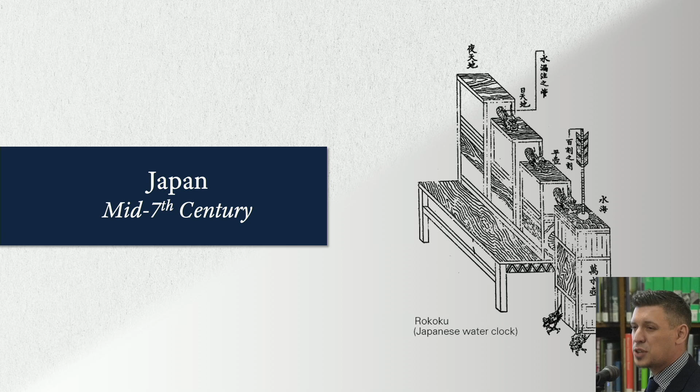So I'd like to touch a little bit on spring drive and how it connects to time and nature. And when I say time, I also mean history, right? The history of watchmaking in Japan, a little bit of a touch on history because I don't want to dwell on it too much.

But to give you the long story short, there's always been some influence from nature in Japanese timekeepers. When we go back to the mid-7th century, we have what's called the rokoku, or the water clock, which was adapted to Japan. This is utilizing nature to keep time. Also, the rokoku has a continuous motion, right? Completely fluid motion, just like spring drive.

Now, there were other timekeepers utilized in Japan. This is used for many, many years. This is something that was around for a very long time. They also utilized sundials, again, using nature to express time.

One of my favorite aspects of Japan's watchmaking history is the temporal timekeepers. So temporal time, or utilizing lunar time as opposed to solar time as we know it. Instead of doing 24 hours, 60 seconds, 60-minute format, they would actually measure time depending on season. So these complex clocks, called wadokei, actually changed depending on what season it was. The hours would actually shift across the dial.

So during the winter solstice, the hours of the day would be shorter, and the indexes would shift to express that. And then in the summer, the hours would change and become longer. The nights would become shorter. So this unique mechanism is a very unusual expression of time and nature.

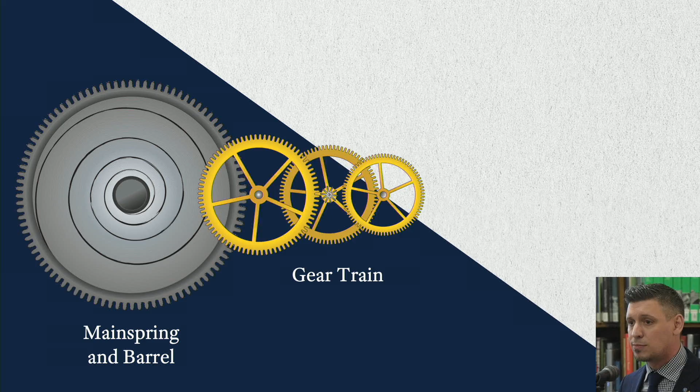Well, if there's no regulation, if there's no control of the pace of time, time flies. The hands just spin across the dial as fast as they can, and there's no power left in a very quick period of time.

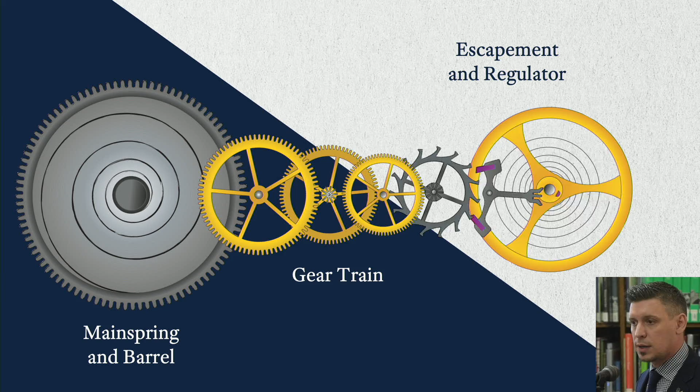So the escapement, or more specifically the lever escapement, is your form of regulation. The balance wheel acts almost as a pendulum. It oscillates, it rocks back and forth, and this develops a rhythm to keep an even pace of time. So this is your regulation, your pace, your rhythm, this is how we keep time.

And as Nick had mentioned, it stops and releases. It stops the gear train and releases the energy. It's letting energy escape in a controlled fashion. This is where the name escapement comes from.

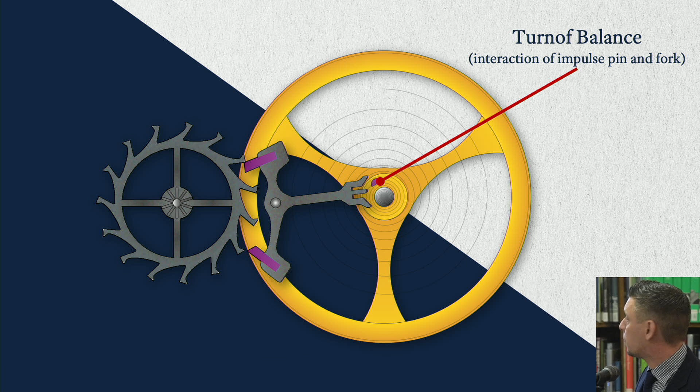So the balance wheel rocks back and forth. You have a little jewel on the balance wheel, which is called the impulse pin. The impulse pin, as it moves, knocks the lever. The lever escapement, this is the lever, also known as a pallet fork, which has 2 jewels on it, your pallet jewels.

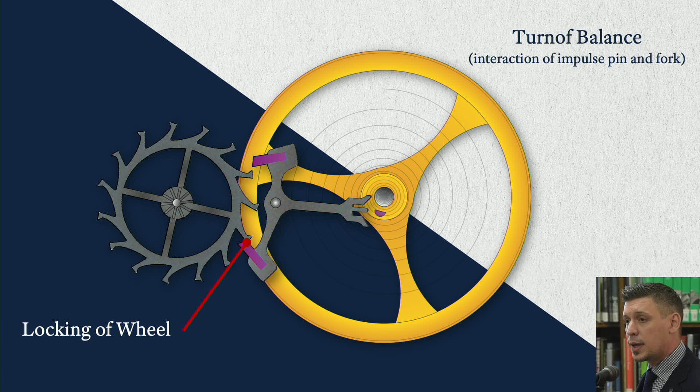The pallet jewels lock the teeth of the escape wheel. It locks on the flat inner or outer surface, which is called the locking plane of the pallet jewel. So there you can see how it's stopping and then letting go, letting the escape wheel turn.

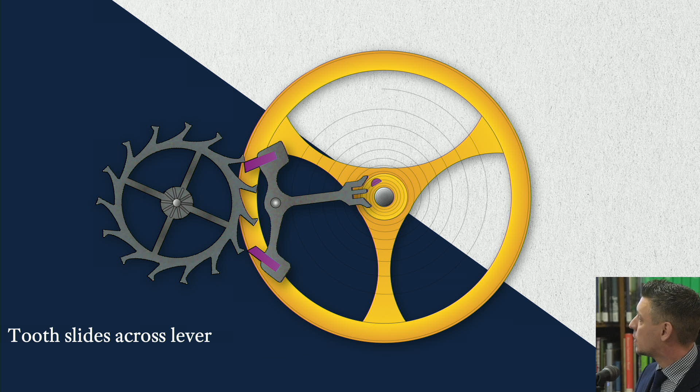As it does that, the tooth of the escape wheel slides across the angled plane that's in front of it, called the impulse plane. And that energy from the escape wheel actually transfers through the lever and delivers that energy back to the balance wheel so it can keep a good momentum. It can oscillate, it keeps the amplitude high.

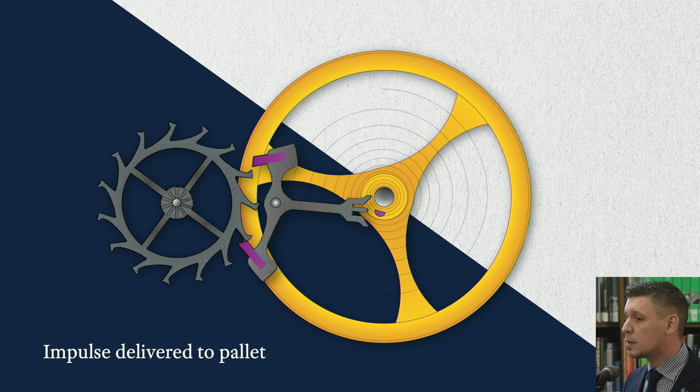This is how it essentially keeps time, with a stop and go motion. Lock and release, lock and release. As you can imagine, there's a lot of collision, a lot of friction that occurs in a lever escapement. But over the years, there's been a lot of developments to help heal, to help keep it operating for the hundreds of years that we've been using it.

So frequency, this is how fast that balance wheel is rocking back and forth, or the oscillation rate, how fast does it move. High-frequency watches were really chased during the 60s, there was a lot of development in high-frequency watches then, a lot of companies were doing it. The benefit of a high frequency is that you're eliminating margin for error, there's less effect from shock or outside factors as that balance wheel is rocking at a faster pace. So that's the benefit, but unfortunately there's a lot of wear and tear that comes along with that. So moving at the faster pace has its upside, but there's also a big downside, which is more frequent servicing.

We find today most watches have a frequency of 4 hertz. 4 hertz is equivalent to 8 beats in a second, or 28,800 beats in 1 hour. We hear these numbers a lot, what do they mean? That's the balance wheel's frequency. So one full oscillation back and forth is equivalent to a hertz in 1 second, that's the whole oscillation, back and forth. A beat would be half of that oscillation, or one direction.

In quartz watchmaking, however, they utilize a quartz crystal to develop frequency. And this is where things start to get tricky, because a lot of people don't necessarily understand how quartz watches work. But the reason quartz watches tend to be significantly more accurate than mechanical watches is because they have a very high frequency.

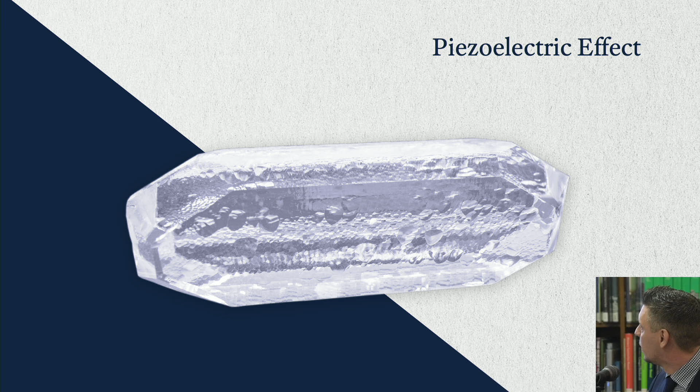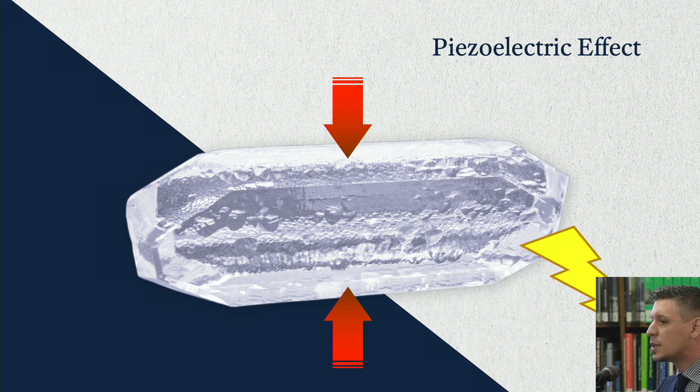In 1880, Jacques and Pierre Curie discovered the piezoelectric effect, which pertains to quartz watchmaking. They discovered that if you compress a material such as quartz, it produces a small electrical current. But in quartz watchmaking, it's actually the inverse effect that's applied. If you apply a current to a quartz crystal, it deforms, or starts to vibrate or oscillate. So this is how you get the frequency. You apply a little bit of electrical current to a quartz crystal, and it makes it wiggle, makes it move.

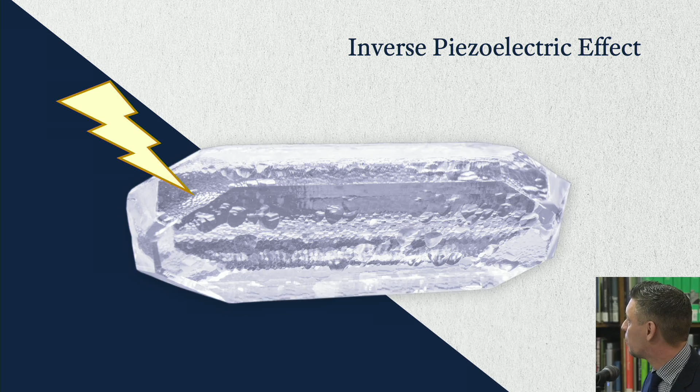Quartz watchmaking was chased by many during the late 60s through the 70s. It was much more prestigious back then than it's found today. I think primarily because of the 80s and 90s, quartz watchmaking became considered low end. But back during the 70s, quartz watches were quite expensive. Many people forget that or don't realize that. So with that said, I'd like to give you a little bit of an education on how a quartz watch works, because it's different. It's not something we necessarily hear about.

The quartz wristwatch mechanism, at least the most common form you'll find today, utilizes a battery. This is the power source instead of a mainspring. Your battery is giving you that little bit of electricity to make sure your watch is getting a frequency to develop a pace of time.

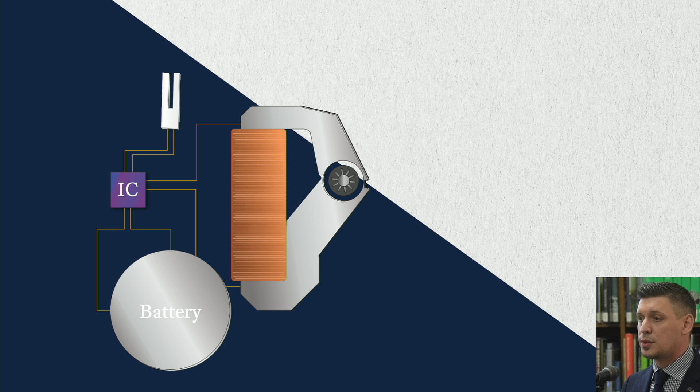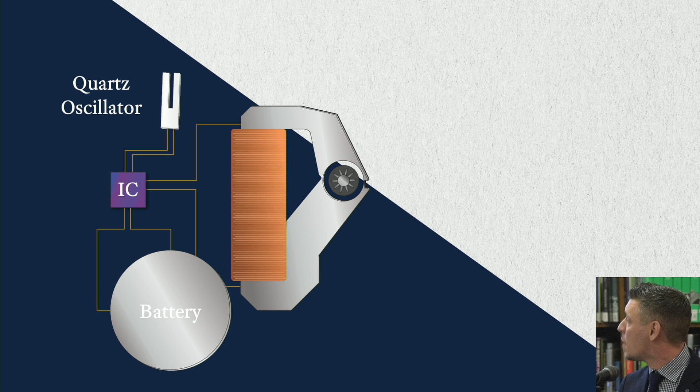The battery delivers the electricity to the integrated circuit. The integrated circuit then delivers the electricity to the quartz crystal. The quartz crystal oscillator vibrates at that very fast pace I talked about, 32,768 hertz, in case you forgot already. It's pretty quick. That frequency is then measured again by the integrated circuit, and it sends an electromagnetic pulse through these coils and coil block. The coil block acts as a delivery system.

This electromagnetic pulse is delivering energy basically once per second. That's why a second hand jumps on a quartz watch from second to second. It ticks. This is to help conserve energy in the battery.

So when it's delivering this energy, how do we translate that into mechanical energy? This electromagnetic pulse interacts with a rotor, and not like a rotor in a self-winding watch. It's not the same. This is actually what we call a permanent magnet. A permanent magnet is like what you would put on your fridge to hang a picture on your refrigerator. That's what a permanent magnet is. It's always a magnet. On that magnet is a pinion, or teeth. It's like a little gear that's attached to that magnet.

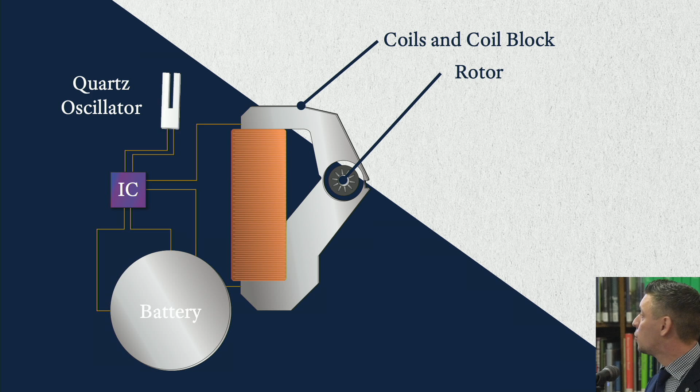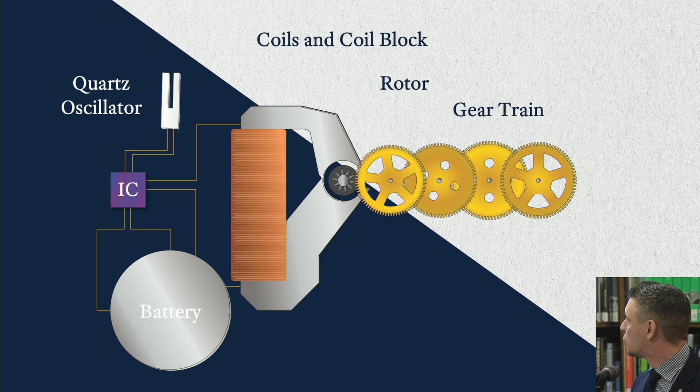So the coils and coil block deliver electromagnetic energy to make that little rotor jump once per second. That electromagnetic pulse is making it jump, and that's how you deliver energy to your gear train. This is your hands, the gear train is driving your hands. Unfortunately, quartz watches don't have a lot of torque, so they can't handle big, heavy hands necessarily. So in order to preserve battery life, you have a second hand that jumps from second to second, and you use lightweight hands.

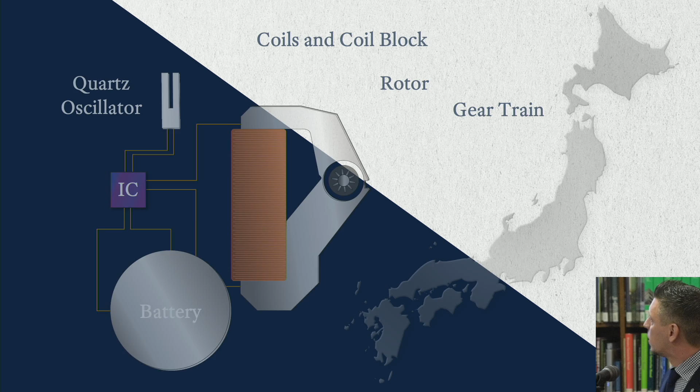So Seiko, you saw the 1969 Quartz Astron pictured there. That was the first commercially available quartz watch, sold in Japan, created by Suwa Seikosha. Suwa Seikosha is in central Japan in the Nagano prefecture. Now it's known as Seiko Epson.

Just to give you a brief rundown, Epson was born from an electronic printer developed for the 1964 Tokyo Olympics. A lot of people think Epson, the projector or printer company, has no affiliation to timekeeping, but it was actually a timekeeper. So just so you know the history, the background of where this name comes from, it built an entire dynasty. It's an entirely separate company. But now Seiko Epson in Shiojiri in Nagano, Japan, is responsible for making wristwatches, and they were named in honor of the success of the Epson printer.

So in 1971, a young engineer named Yoshikazu Akahane joined Suwa Seikosha. He was really a brilliant engineer. He developed something really cool in our history called the Twin Quartz.

It used two quartz crystals that compensated temperature for each other. They used the average between the two to determine how accurate the watch could be. And back in the 70s, he was able to create this and make watches that were accurate within 5 seconds per year. Pretty astounding, right? I don't think you can become that accurate in the 70s.

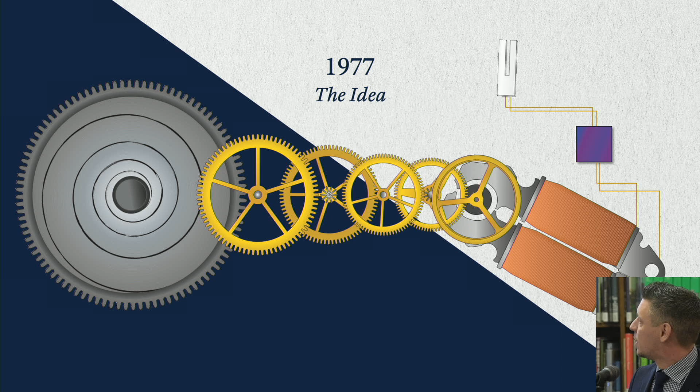But it's very influenced by position or shock or temperature. So he wanted to create something that had all the benefits of quartz in terms of precision and stability, but have this high power source, this never-ending power source from a mainspring. So he had this idea in 1977. He was way ahead of his time. So this idea was based on a bicycle rolling down a hill. And that had no brakes, just so you know.

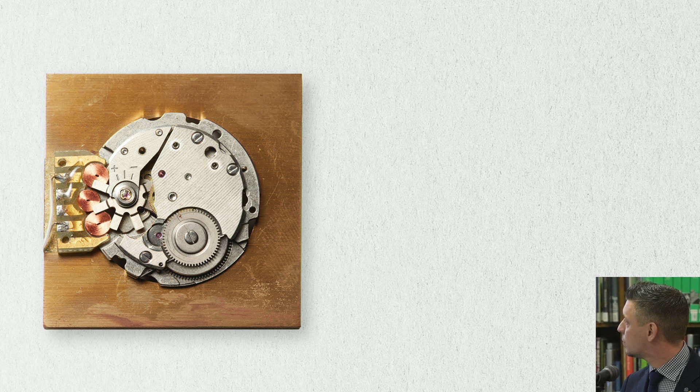But by utilizing brakes, you can slow the speed, keep an even controlled pace. Unfortunately, applying a physical brake is not good, because friction is a watchmaker's worst enemy, so we don't want that. So friction had to be eliminated. So to eliminate friction, he took that electromagnetic energy and came up with the concept for Spring Drive.

So in 1982, they had the first functioning prototype of Spring Drive. Pretty remarkable, had a 4-hour power reserve. Okay, maybe it wasn't that remarkable, but you got it to work, and that's what's important, right? They were on the right path. So the first Spring Drive, like I said, had a 4-hour power reserve. It wasn't as energy efficient as necessary, and it took a lot of power consumption. So in order to improve, it took time.

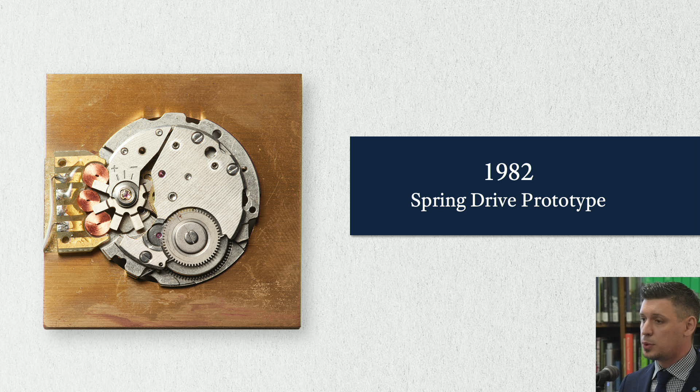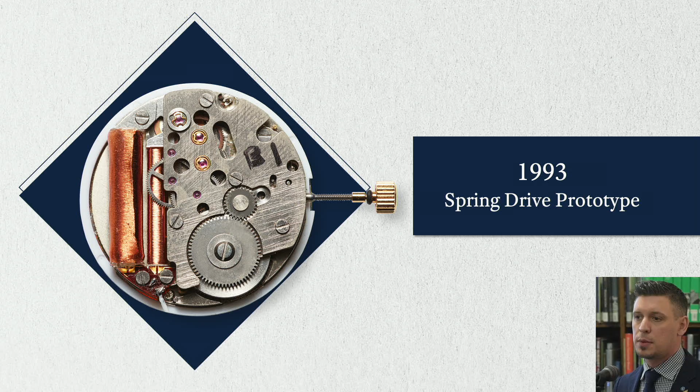By 1993, the next evolution in Spring Drive had occurred. Boosted, right? 4 hours, now it's 10. And this was thanks to a new integrated circuit technology that helped reduce electronic and electromagnetic power consumption, let's say. So this aspect was able to increase the power reserve because it didn't have to work as hard to try and make those electronic components work.

In 1997, a big breakthrough came. They had this internal goal for Spring Drive: they wanted to make it run for 48 hours. So 4 hours, then 10 hours, we got to get to 48. Well, they did it in 1997. The reason this was possible was because of a new integrated circuit technology that was developed by Seiko Epson, or Suwa Seikosha as it was formerly known.

So this prototype led to the first debut of a prototype in April at Basel World 1998. Success, right? We're getting there. A little funky design, but still very cool. I'd take one.

Sad part of the story today, though. Mr. Akahane, the brilliant engineer behind Spring Drive, he died in August, at the young age of 52. Thankfully, though, he was able to see his dream come to life. He had met his goal, and that is a huge success in, I think, all of our eyes at this point. Spring Drive is really something special. So Mr. Akahane's legend lived on in Spring Drive, still does today.

And in 1999, they launched the very first commercially available Spring Drives. Now, these were only released in Japan, so you may not see them. There's something that don't float around very often. I'm not hinting at anything that you might be able to see after we're done. So this was very small production. These were manually wound, and they had a 48-hour power reserve.

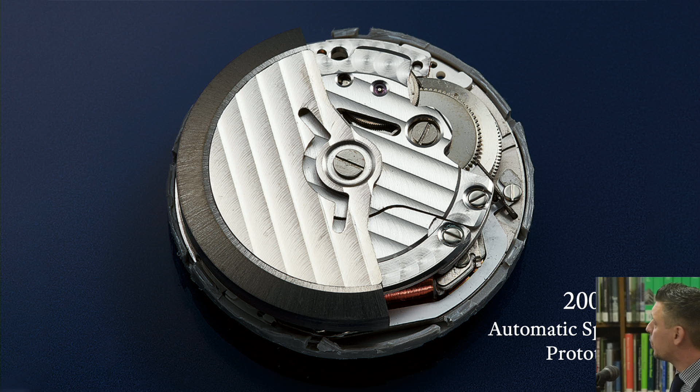From there, it wasn't until 2003 that the next real big development had occurred, and this was self-winding. It seems simple, but no, you have to have high energy efficiency, high winding efficiency. A lot of factors come into play in making this thing work. So thanks to the Magic Lever winding system, they were able to make a very highly efficient self-winding movement. And from that, also a new mainspring material.

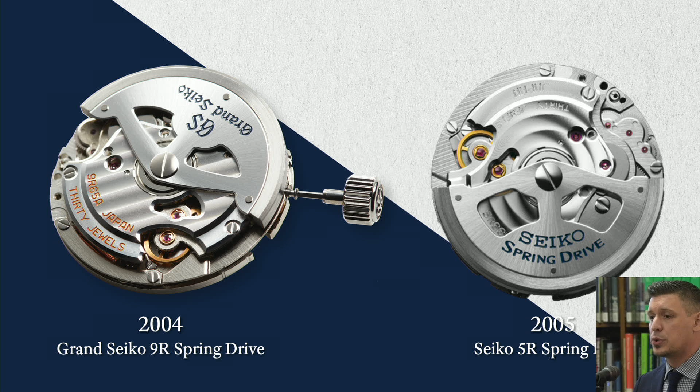In 2004, they debuted the first Grand Seiko caliber, the 9R spring drive. The 9R had a 3-day power reserve and amazing accuracy, coming along with basically all spring drives, within 15 seconds per month, equivalent to less than a second a day. Very accurate, very stable. In 2005, they launched it internationally for the first time, in the 5R Seiko spring drive brand.

So all this development, you have from 1977 all the way to 2005 to make it a commercial product worldwide. That was 28 years. That's a big investment, that's a big commitment, but it was done. And like I said before, Mr. Akahane's dream lives on.

Now comes the hard part. How does spring drive work? I think everyone wants to know. It's a mystery, right? It's an enigma to many.

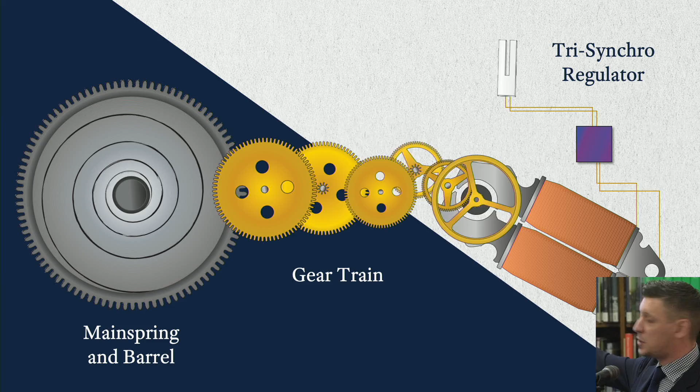As you saw before, you're going to see similarities from both worlds of watchmaking. You're going to see the mainspring. It operates the same, unwinds inside the barrel, delivers energy to the gear train. But by the time you get to where the escapement should be, it looks very different. We call this very different escapement system a Tri-Synchro Regulator.

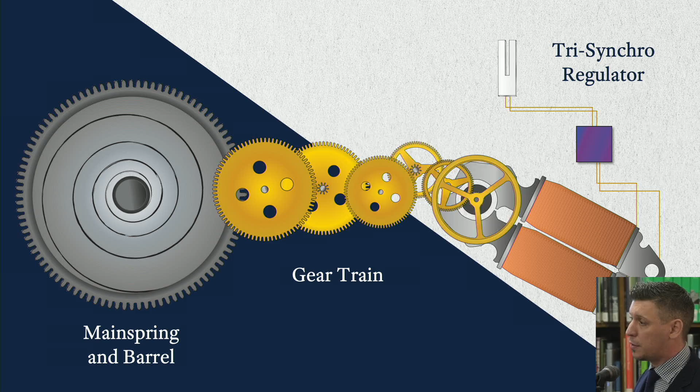This is the magic behind spring drive. I should say, some of the magic behind spring drive.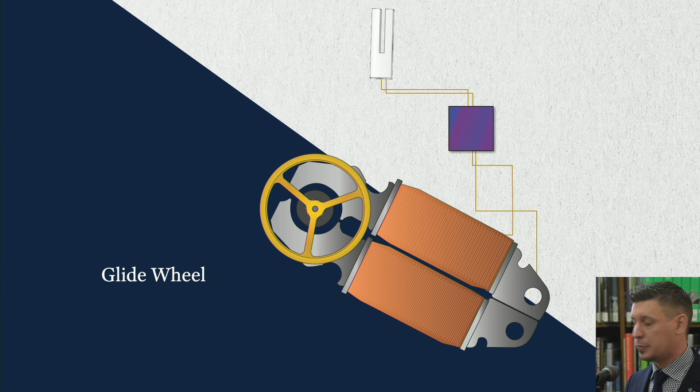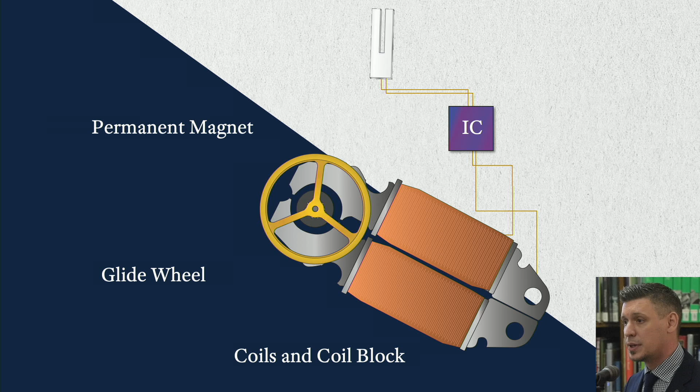Instead of using a balance wheel that rocks back and forth, we have what's called a glide wheel, and it rolls in one direction. On the axis of that glide wheel is a permanent magnet, like I said before, something you can throw on your fridge - it's always a magnet. You have coils and a coil block, which you saw from the Quartz. You also saw in Quartz an integrated circuit and a quartz crystal oscillator.

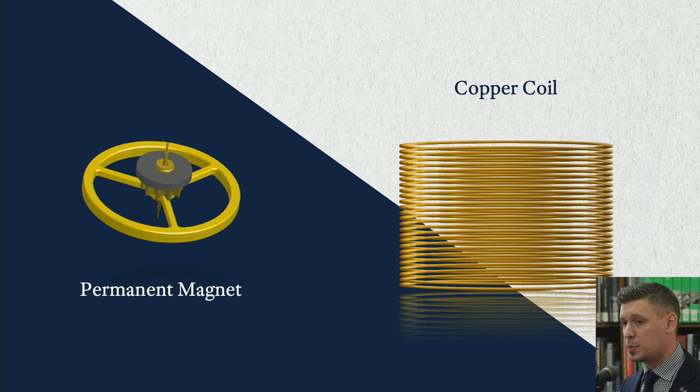So our fun fact of the day: if you have a permanent magnet, always a magnet, and it's in motion near a conductive material, such as copper - in this instance it's copper - you can actually generate electricity. So this motion generates electrical current.

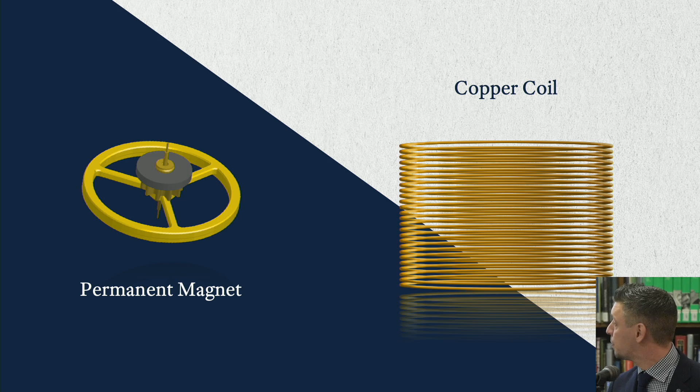So there are 3 forms of energy utilized in spring drive. You have mechanical energy, which generates the electricity coming from the mainspring. You have electricity, which powers your integrated circuit and your quartz crystal. And then you have electromagnetic energy - that's the fun part, right? That's where we're getting a little complicated. I'll show you in just a minute.

So the mechanical energy aspect: the power from the mainspring drives the gear train, and it turns the glide wheel and magnet. That magnet starts to spin near the conductive material, aka the copper coiled wires, and it generates a little bit of electricity.

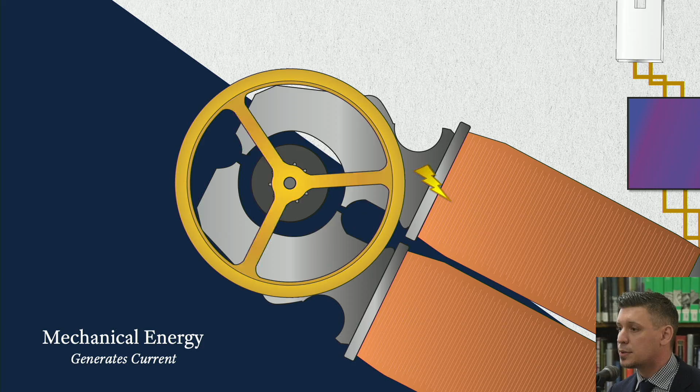Then from there, you have the quartz crystal's oscillation. This thing's vibrating, just like in your typical quartz watch, 32,768 hertz within 1 second.

From there, the integrated circuit measures the frequency of the quartz crystal to calculate time.

And then, the integrated circuit measures the speed of the glide wheel - it measures the rotational speed of the glide wheel. So if that glide wheel starts moving too fast, it utilizes the coils and coil block to deliver an electromagnetic pulse to the magnet that's spinning on the glide wheel. The glide wheel needs to spin exactly 8 times per second. If it starts to spin faster than that, the integrated circuit applies electromagnetic energy, delivers it back through the coils and coil block to react with the magnet that's on there.

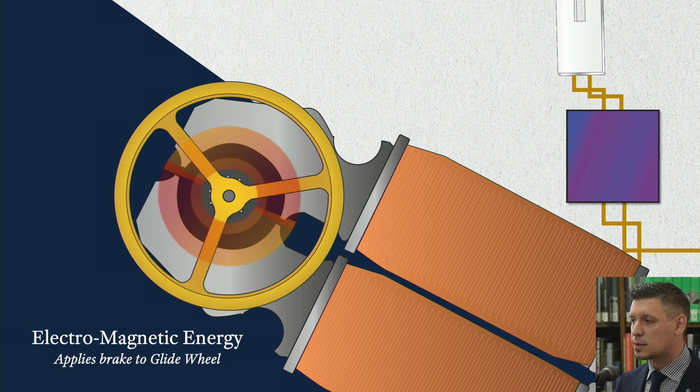Pretty neat, I hope it makes sense. I try my best.

One of the big challenges, as I mentioned before in Spring Drive, was energy efficiency. Power consumption was huge on those early prototypes, and as they went on over the decades, that came along with it.

One of the big hurdles we overcame, which you saw in that 1997 prototype, was the in-house development of an SOI-IC, or silicon-on-insulator integrated circuit. Unlike other integrated circuits, it utilizes a silicon dioxide film to prevent parasitic traits, which equate to power loss, and also a trait called leakage, which is another form of energy loss. By using a silicon dioxide film in the integrated circuit, it prevents the power loss, making it much more energy efficient and needing less energy to run.

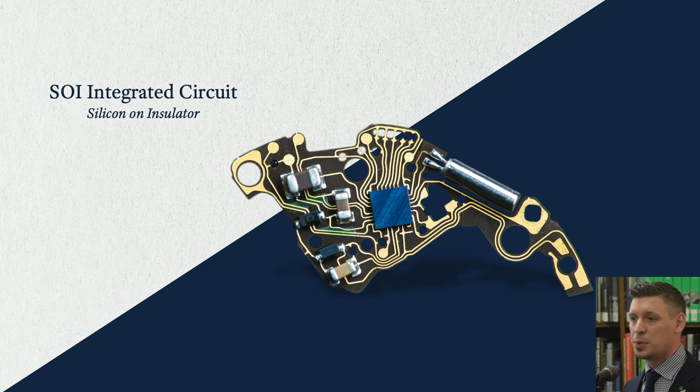What's also cool is that most integrated circuits, after some time, fail due to leakage. That's one of the big problems with most integrated circuits you'll find, for example, in a quartz watch. This is something that helps contribute to multiple aspects of Spring Drive's operation.

Here's another fun fact: how much energy, or electricity, is actually utilized in Spring Drive to make it work? It's 25 nanowatts. To give you an idea of how little energy that is, if everyone in the United States, 328 million people, were wearing a Spring Drive watch, they would barely be able to power a 10-watt LED light bulb. That's very low power, almost nothing, but it has to be something, otherwise Spring Drive wouldn't work.

Another aspect to improve energy efficiency on Spring Drive was the way the copper coil wire is bound around the coil block. In many quartz watches, you'll see a typical coil alignment that's very sporadic, with a lot of little gaps between the coils. That also equates to energy loss, both on the electronic and electromagnetic sides of the Tri-Synchro Regulator.

By creating a perfect coil alignment, and when I say perfect, it looks pretty perfect, it's actually wound 25,000 times around the coil block. You need to see it, we have it in the display back there, take a look. It's a very, very small component.

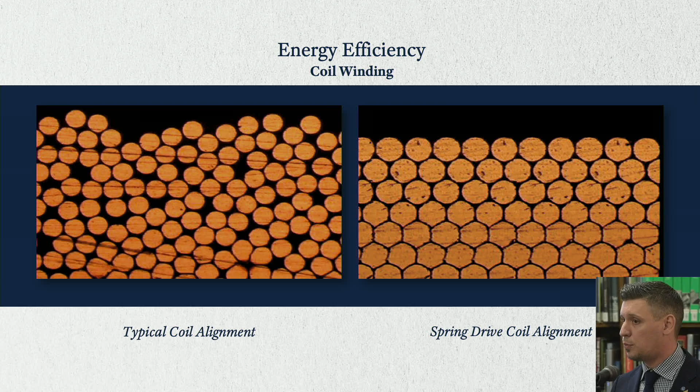What's even more impressive is that this wire is only 15 microns in thickness, in its diameter. Human hair is 40 microns. That's a very thin wire.

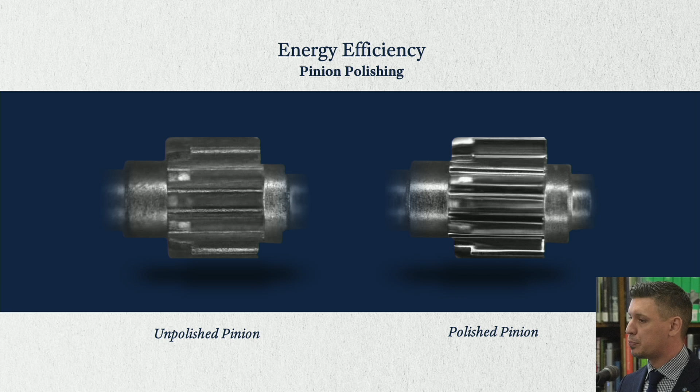It's not just on the electronic side of watchmaking that Spring Drive needs to improve energy efficiency. Another aspect on the mechanical side is pinion polishing. As I mentioned before, friction is bad, we don't want it in our watches. The rough surface of an unpolished pinion creates friction, which equates to power loss, minimal but still. By polishing every single pinion leaf or tooth, you're able to reduce friction and help improve that energy efficiency.

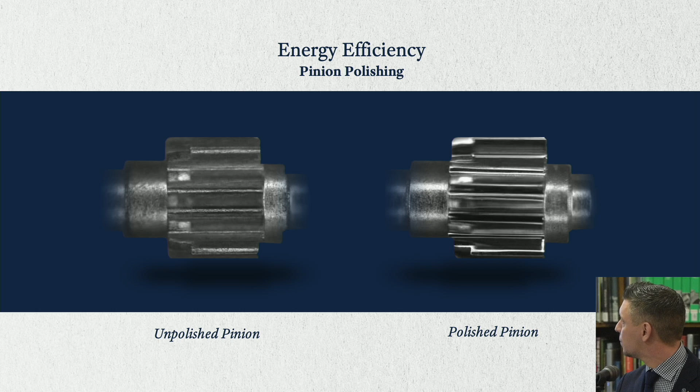On top of that, there's a really cool mainspring that provides a long duration of 72 hours and enough torque to drive everything and make it all work. So the mainspring is also a contributing factor to bringing Spring Drive to life.

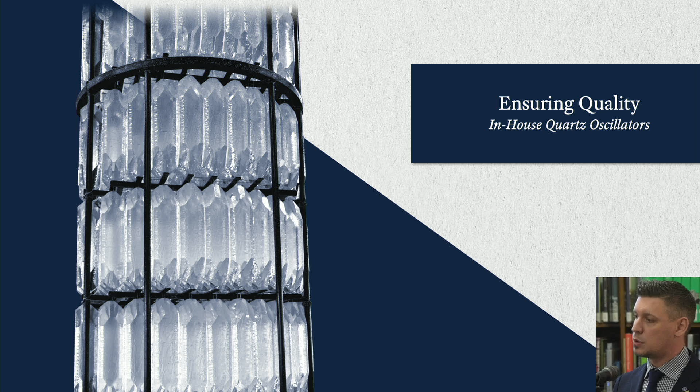This next aspect isn't about energy efficiency, but more about ensuring quality, and people just find it interesting. Quartz crystals are grown in-house for Spring Drive, so we can assure high quality when we cut them into these little tuning forks in order to develop the frequency in our watches. It's a cool process - if you have questions about it, come ask me afterwards, I'll talk about it all night.

Spring Drive is a very complex mechanism. We went through all the prototypes and all the development, but realistically, Spring Drive has over 200 components starting in the most minimalized movement, all the way up to as high as 680, depending on what movement it is. These are all assembled by hand to make sure everything is adjusted appropriately, so energy is transferred correctly. You want good hands assembling the watch to make sure the transmission of energy through the gear train is perfect. There are two studios that make Spring Drive movements.

One is the Shinshu Watch Studio in Shiojiri, Nagano, the same place where the Suwa Seikosha was. Then there's the Micro Artist Studio, which does all the real remarkable handcrafted pieces, like the Caliber H2. You'll see some of these in the slides and also some in the back for the presentation, brought special tonight.

One of the big debuts from the Micro Artist Studio that made quite the wave was in 2006, when they developed a Spring Drive Sonnerie. The Sonnerie has about 630 components and required 88 tools. There's a lot going on in there.

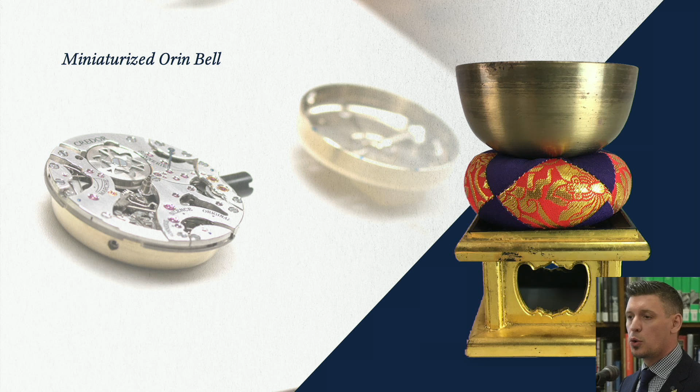This beautiful piece, unlike most chiming watches, doesn't use gongs. It actually uses a miniaturized Orin bell that sits on the underside of the movement to produce the chimes.

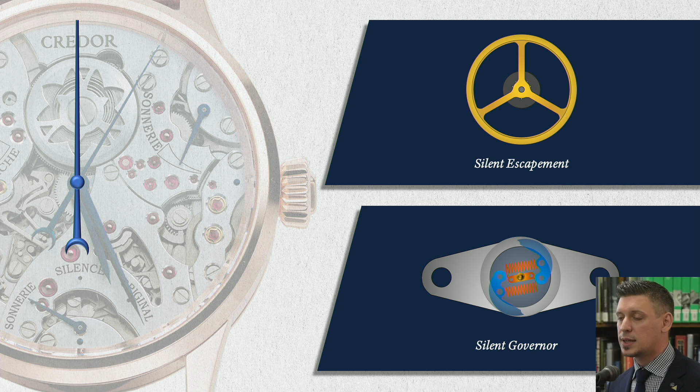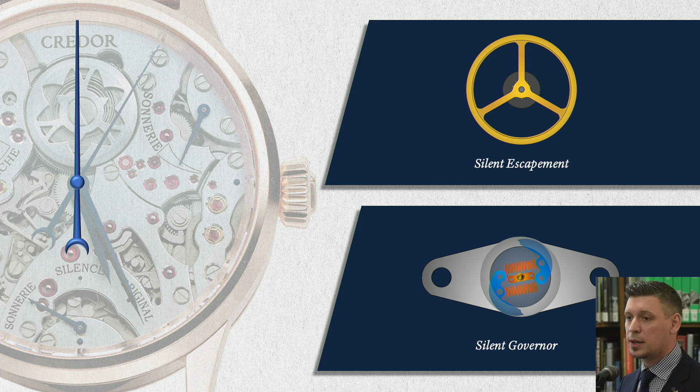What's really remarkable about this chiming watch is that Spring Drive has a lot of great benefits — it's very accurate, very stable, with no collision or friction — but that also means it's silent. There's no locking and unlocking, no tick-tock, everything glides one way. So the escapement is silent, meaning there's no background noise.

In many chiming watches there's a governor that controls the speed of the striking hammers. In Spring Drive, in the Sonnerie, the governor is also silent — little fan blades pop out and it works off the viscosity of air to control the striking of the hammers. So there's no background noise in this chiming watch, just pure chime.

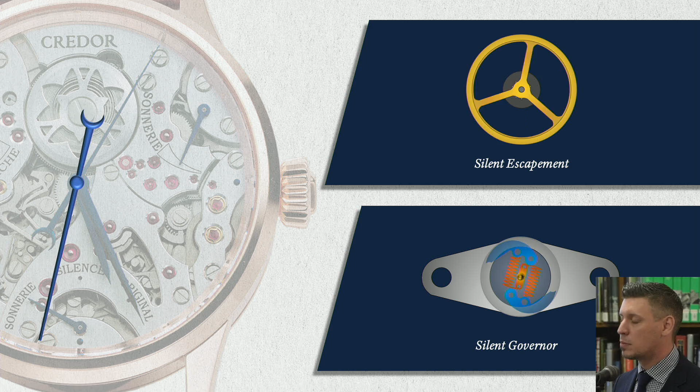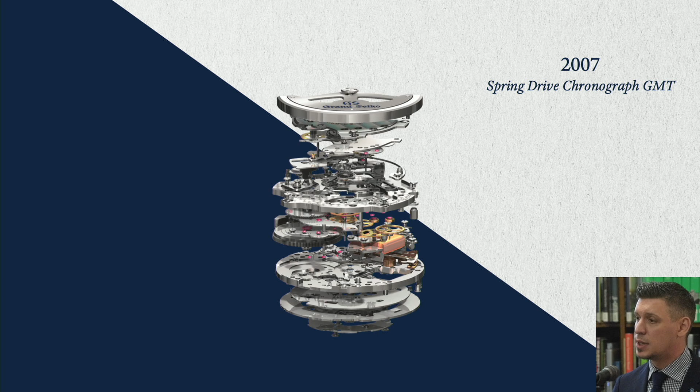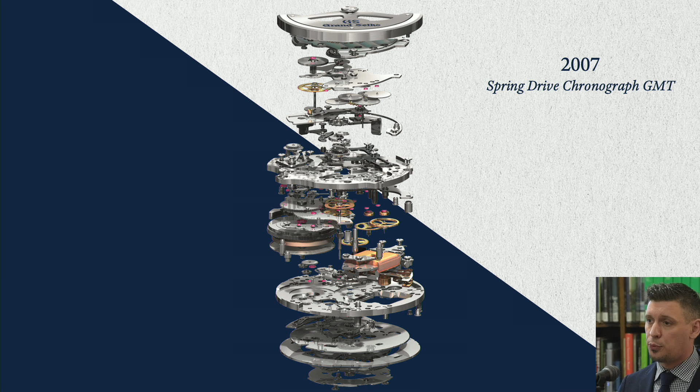In 2007 came the launch of the Spring Drive Chronograph GMT, with over 400 components. I'm wearing one of those too. This is a very remarkable movement, all made in-house, very complex, and really a reliable chronograph. It's very accurate — as I mentioned, 15 seconds a month, equivalent to less than 1 second a day, is the accuracy of Spring Drive, and that translates to the chronograph as well.

It also utilizes a vertical clutch and column wheel system for enhanced performance. These movements are so robust that the Chronograph GMT was actually used in the 2008 Spring Drive Spacewalk. This was taken to space, worn outside of a spacesuit, outside of a spacecraft, by a Russian cosmonaut, and it worked perfectly — there's basically no effect from position, shock, or extreme temperatures.

So there's a lot of really unique benefits that come along with Spring Drive and how it operates.

In 2011, a new chiming watch was launched — a minute repeater, a decimal repeater. It chimes a low tone for the hours, a double chime every 10 minutes, and a high chime for every single minute that follows. Instead of using a bell, we worked with a 52nd generation blacksmith who makes renowned wind chimes in Japan, like a national treasure — these wind chimes produce a very beautiful tone. This gentleman, Munemichi Myochin, actually makes these gongs special for us.

So this is reproduced again with the silent escapement, the silent governor, and pure, beautiful wind chime chimes. You'll be able to hear this watch tonight as well.

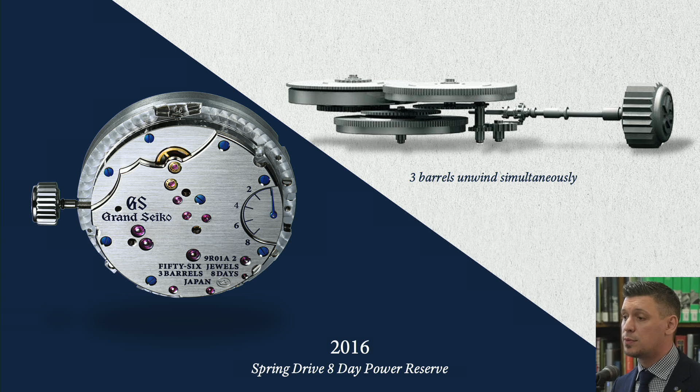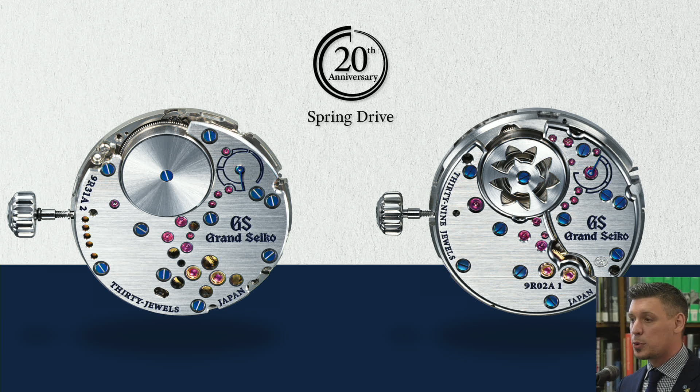In 2019, it was the 20th anniversary of the very first commercially available Spring Drive watches, so we had to do something cool for that. Two new calibers were launched that year — another cool innovation. The first one I'll talk about is the 9R31 caliber.

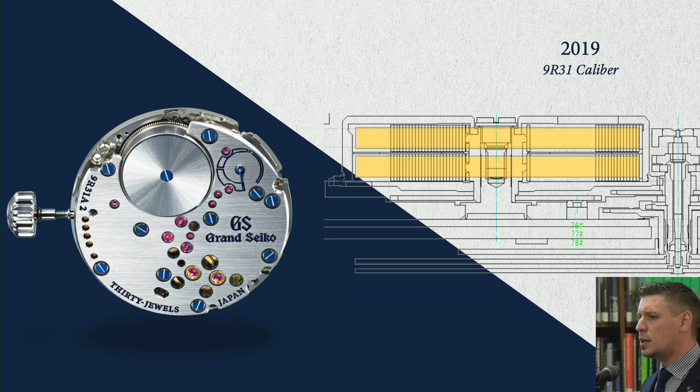It's as thin as the original, yet has a longer power reserve of 72 hours instead of 48. This is achieved by using 2 mainsprings, but uniquely they're all housed in 1 barrel and unwind simultaneously. This new system is implemented in the 9R31 caliber.

Another attribute goes back to 2008 when we launched the first Eichi. A lot of people are familiar with the Eichi, the porcelain dial Eichi. There was the first generation, Eichi I, and then the Eichi II, which utilizes a special system called the torque return system, currently giving it a 60-hour power reserve.

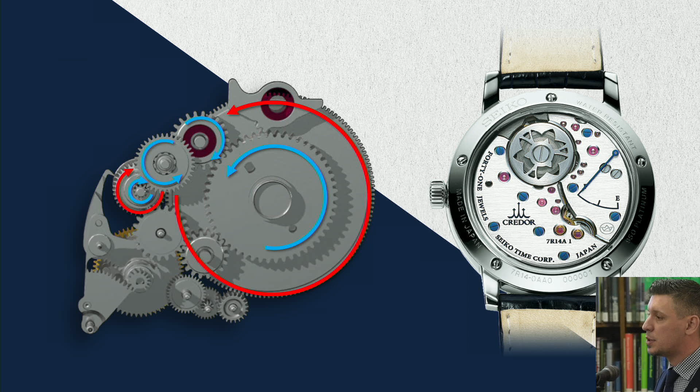Most mechanical watches, all mechanical watches really, have high torque at full power reserve, and there's always extra torque that just ends up lost in transmission. This really innovative system utilizes the excess torque from the barrel as it's unwinding and sends it through a separate gear train that comes back around to the ratcheting wheel, actually rewinding the watch. That way it enhances the power reserve from what should be 48 all the way up to 60. Pretty neat.

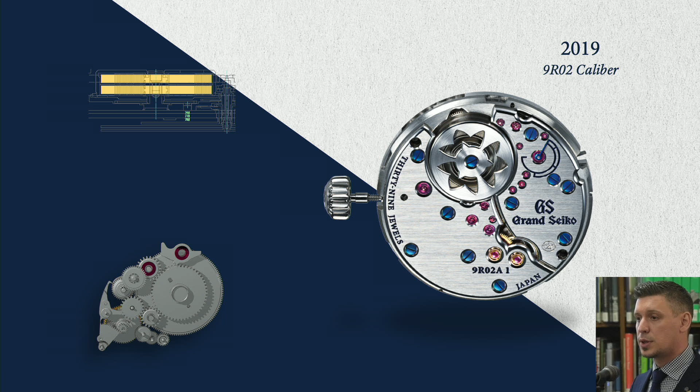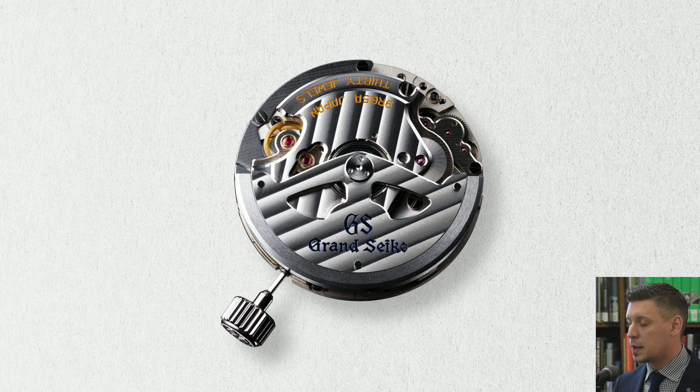There have been a lot of innovations with spring drive over the years, and I'm sure at some point there will be more to come. In the end, you have a mechanically powered watch, a spring-driven watch, hence the name, that attains the high accuracy of quartz, with the ultimate stability and accuracy—no effect from position, shock, collision, or friction. A lot of really cool things were done in this movement, and time is expressed moving one way, forward—just like time itself, only moving in one direction, as Nick had mentioned.

So with that said, this is spring drive and how it relates to nature and time. I'm not quite done yet, though. I'd like to invite our very special guest, Mr. Akio Naito, and Mr. Kazunori Hoshino to the stand. Mr. Naito is the chairman and CEO of Grand Seiko Corporation of America, and Mr. Hoshino is product planner and designer at Seiko Epson Corporation, responsible for probably some of your favorite designs in Grand Seiko and Spring Drive.

Thank you, Joe. Good evening, ladies and gentlemen. It is my pleasure and honor to be able to present the spring drive technology, our proprietary technology we are so proud of, and I hope you all enjoyed Joe's presentation.

The gist of Joe's presentation, I think, is that there are two essential pillars which made it possible for the technology to be born. One is the highly sophisticated technical design, made possible by a team of engineers coming from a wide spectrum of technological fields. We have a very long history in mechanical watchmaking, as Joe explained. Not only that, we have so many engineers working very hard for many years in the fields of quartz crystal making, as well as electronics and various peripheral fields. Combining all this knowledge and expertise, we were able to come up with the pinnacle of watchmaking technology, not just out of a single technological field, but multiple fields necessary to make this happen.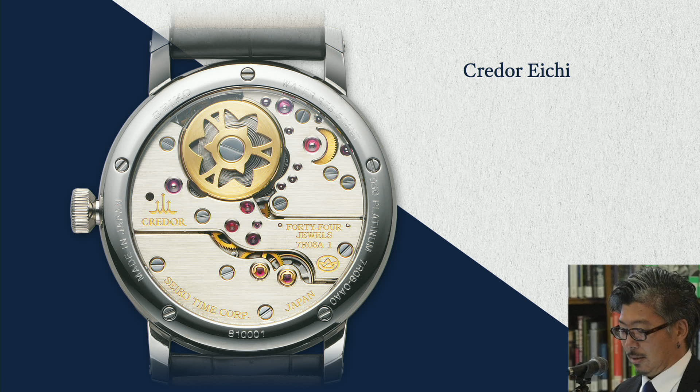The same concept appears on the Eichi II. This theme was taken from old Japanese paintings, depicting the natural scene of the moon, with cloud or mist underneath, visible in the upper right.

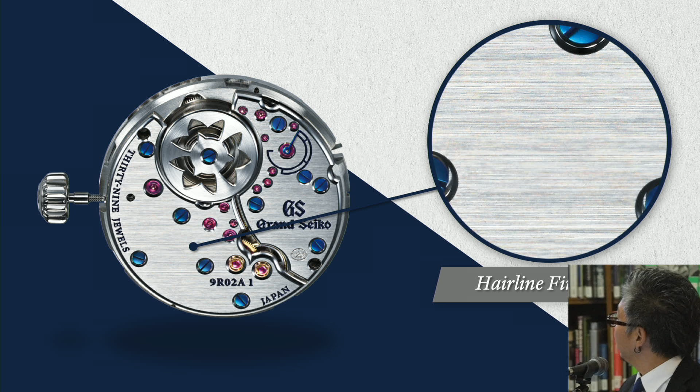By applying hairline finish on a perfectly flat surface, the light is suppressed, which realizes the concept of shadow.

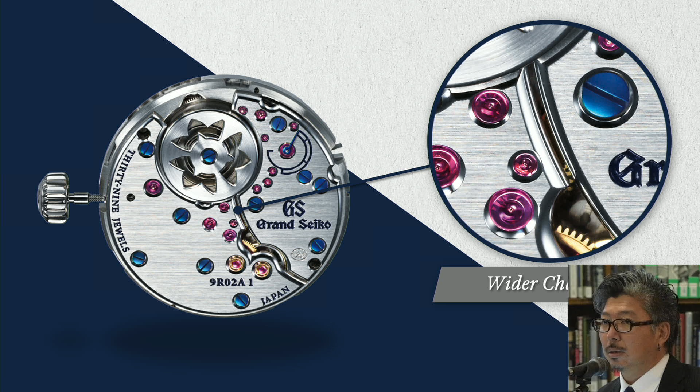Now here is the mirror-finished part, which in contrast realizes light as opposed to shadow. This part is entirely polished by hand.